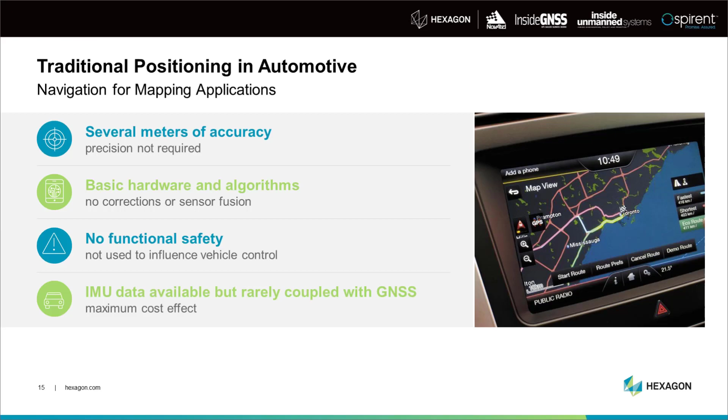So with this introduction of autonomous technology and even driver's assistance systems, we're talking anything level 2 to level 5, is where there's a real demand for augmented GNSS positioning, right? So we're going to start talking lane level. We're going to need the vehicle to know where the lane is and that it's within that range. So we're talking down to the sub-meter level and also assuring that positioning. So let's talk about how we get there, right? So walk us through a little bit of how we can get to that sub-meter and assurance.

So really the big first step is enhancing the hardware. We need to talk about multi-frequency, multi-constellation. We really need to get all the data that we can. You need to have at least the dual frequency antenna and a receiver and all the things into the vehicle to get you there. And that takes you from several meters down to the meter level.

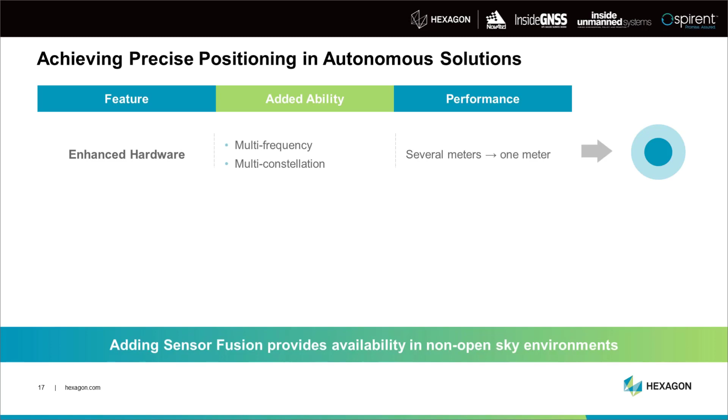Now, if you feed in some correction data, so you get correction services of some sort, and you feed that correction data into that algorithm, that'll get you into the decimeter range, right? So that starts getting into the sub-meter, and that's where you can start saying reliably that you're in the lane of the road.

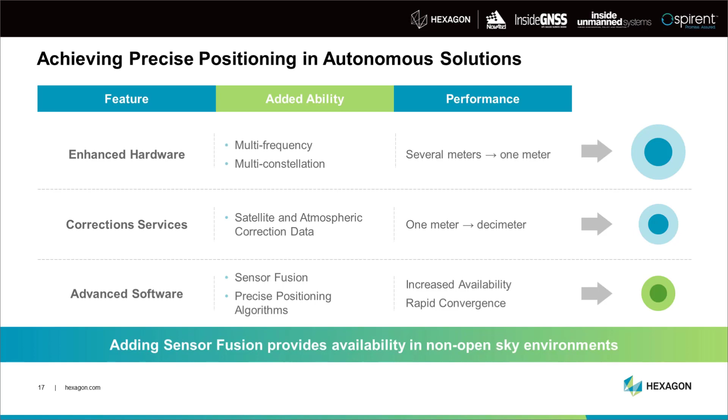The advanced software now is where the really sophisticated stuff comes in. This is where safety comes in, sensor fusion to increase your availability, your algorithms and that stuff to get rapid convergence, so that way when you turn your vehicle on, it's there right away for you to be able to use. So this is sort of the steps to go from what we have in most vehicles today down to the autonomous systems for positioning.

So I'm going to peel the onion here a little bit and talk about the corrections, right? So I mentioned corrections data as a critical point to get the system to work properly. There's two ways of doing this, and two common terms out there.

RTK is one of them, and PPP, or precise point positioning, is the other. RTK involves the end user, the customer, setting up a base station of some sort in a known location, and that's key. It then compares its measurements from the satellites to that known location and provides a correction to that measurement to the receiver in the vehicle, or the rover, as we call it in the diagram. Important thing to note here is that's a two-way communication between the base receiver and the rover.

Precise point positioning: in our case, Veripos and Hexagon have a corrections feed that we can provide to the users. We have all the stations running and are maintaining those, a very critical part of it. And that allows for a one-way data transfer, or one-way communication, to the vehicle. So this really helps with the security and all those things. And that typically is done over the internet or LTE or some sort of network connection.

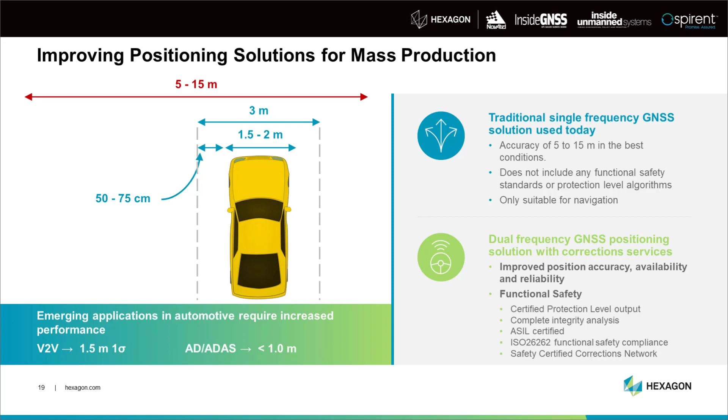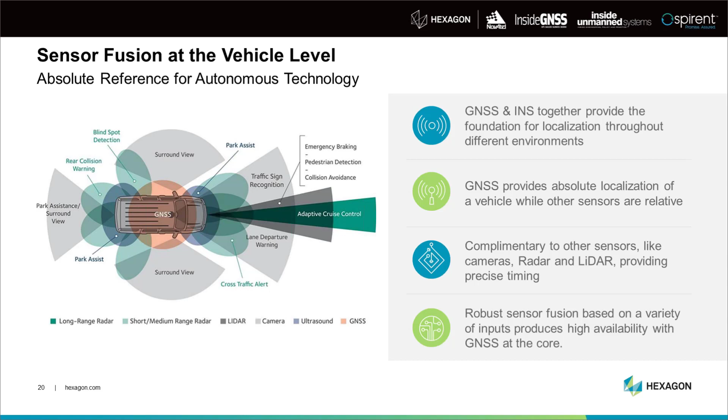All right, let's talk about all the different sensors. Everyone always talks about LiDAR and radar and all these things. A frequent question we get is, can we replace some of these with lower cost, or if we have a good GNSS receiver, what's the cost trade-off? But it's really meant as a complement. You can see here all these relative measurements, or relative positioning, as we call it. LiDAR, cameras, it's all looking at the relative surroundings, whereas GNSS is an absolute measurement on the globe. It tells you exactly where you are in the world. So the systems are really meant to complement each other and be integrated together, especially on the safety side of things.

Obviously, urban environments are always a challenge. People always ask how does your GNSS work in an urban canyon? Well, if you block the sky, there's not much we can do from a GNSS point of view, but there are sensor fusion and IMUs that'll help you with that, and the other sensors will do really well in this situation as well. So again, it's that vehicle level solution that is really the point here.

So let's talk about the system architecture on a vehicle: electronic control modules and all the electronics. There's hundreds of modules on a vehicle, but particularly for our solution into production, we have GNSS antennas and the LTE antenna. There's always some form of telematics module, usually tied to the infotainment system. And then there's some sort of feature control module, an ADAS or autonomous driving module, and that's where your artificial intelligence will often be sitting.

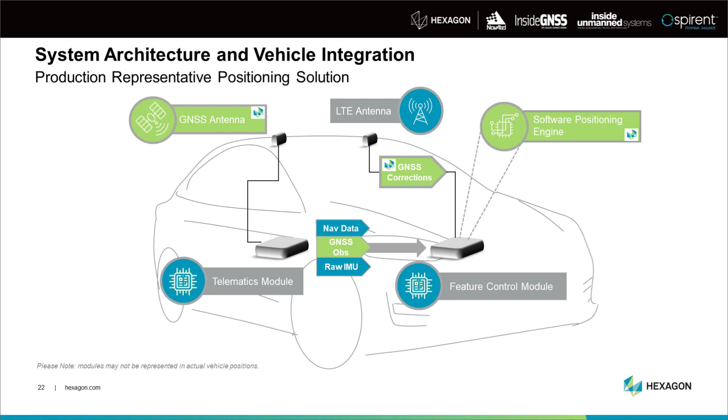So our solution integrates into this very nicely. We take the GNSS measurements and observations from the telematics module, and that is fed into the feature control module where our safety-rated software positioning engine would then give you the feature control.

So the output there is position, velocity, attitude, and that is fed into the vehicle control. So let's look at this closer. From a validation point of view, all you automotive guys out there on the line, and any electronics module manufacturer for that matter, all understand the system boundary diagram, right?

So the device under test, and I'm just going to pick on the software positioning engine alone. We look at all the inputs on the one side and we have all the outputs on the other side. As we test, we're always monitoring outputs and we need to vary the inputs. I'm just going to talk about the range and the observation data input. All the ranges need to be tested.

Every functional range, everything that you could possibly think of as an input in the world has got to be fed into this, including how it fails, all the faults. Some of the value ranges we talk about here are like satellite geometry. If you're tracking 10 or 20 satellites in the sky, imagine all the possible geometry combinations there. And then think about how they'll fail, or if you're only down to 6, what happens?

All of that full range needs to be tested: multipath, signal to noise, and that satellite count as I just highlighted. And in addition to that, how they fail. You need to understand the failure mode of each one of these, input that into your software positioning engine and see how it behaves. It needs to behave in a completely predictable and consistent manner in order to achieve that safety.

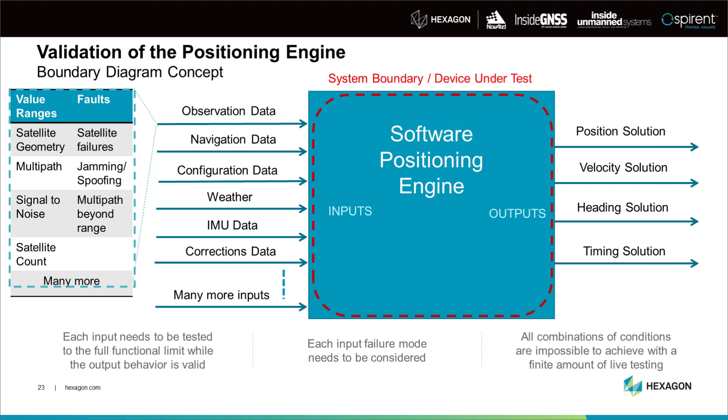So faults are satellite failures, jamming, spoofing, multipath, and I'll talk a little bit more about that in range. You can imagine every input has a full range of functionality, a full range of faults. All that stuff needs to be taken care of.

So integrity, there's another definition I'm going to pick on a little bit. That's basically a study of how GNSS can fail, or the positioning solution can fail. We really need to understand that in order to give it a rating and to make sure the performance is there. Ground segment failures, false orbit calculations, those are all part of it.

Hardware failures up in the satellite itself, what we call evil waveforms. That's truly a definition, not a word I just made up. If we get a waveform that has been tampered with or not broadcasting properly, that's important. Atmospheric failures: not everybody knows the atmosphere does weird things, bends the signal and does a whole bunch of funny things to it, but it's really the extreme conditions of that.

What happens if you have an ionospheric storm that happens once in 100 years or something? These are the conditions that really need to be predicted. Difficult multipath, and I'll talk about that in the next slide a little bit. There are some conditions in multipath that are really hard to detect. You can't just circle your measurements and say this is my safety range.

And then spoofing and jamming, as we saw from the poll, this was a hot topic as well. There are a lot of ways to mitigate this and to detect it, as a matter of fact, with the algorithms that we have. Then there's your cybersecurity side. If someone's hacking into servers and then broadcasts to all the vehicles on the road, that type of thing. So all these things are really, really important.

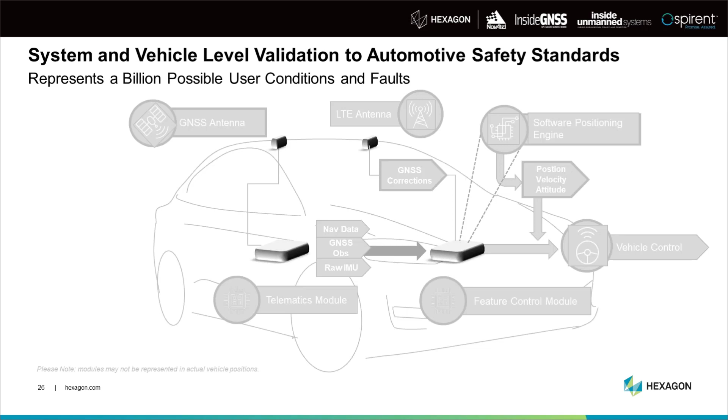We're talking billions and billions of possible conditions in the world, everywhere around the planet, in the vehicle, user errors. I mean, all these things are inputs and outputs, and that all needs to be done in the analysis, as Richard had introduced us to earlier in the talk as well.

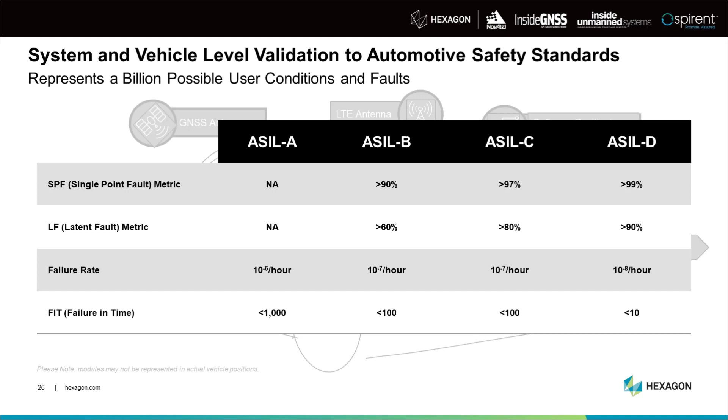So typically your ASIL ratings, your safety ratings for autonomous driving, is ASIL D, right? So your failure rate there has got to be 10 to the minus 8 per hour; that's all it's allowed to miscalculate or misrepresent. So really, really stringent safety on top of millions and billions of combinations. This is really what we're faced with, and this is how we dissect it and get the solutions out there.

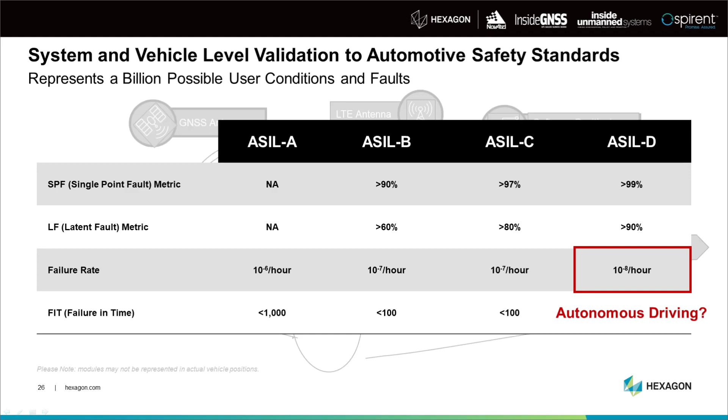And for those of you in the audience who during the poll question at the beginning wanted to choose multipath and sent in comments about it because it wasn't offered, you saw that Gordon did discuss multipath there. We were simply limited in the number of options we could offer you. But multipath is definitely a failure mode that is factored, and we are discussing today and will continue to discuss.

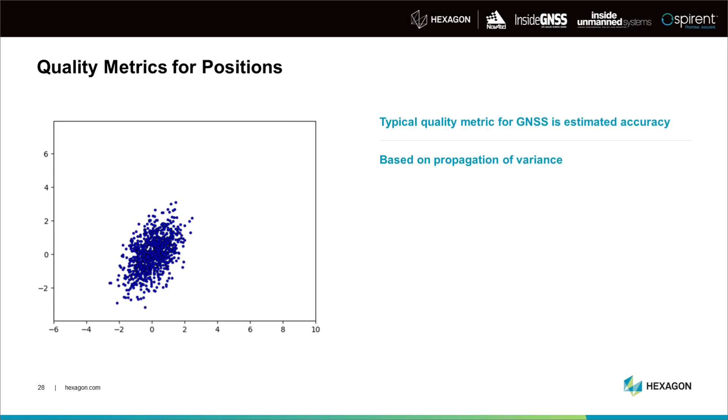Typically, from a traditional GNSS system, the quality metric that you'd be used to seeing is the estimated accuracy. It's based on the propagation of variance through the position computation. You'll have some point cloud coming out of your system, and you'll get a confidence ellipse around that point cloud, sometimes a confidence circle. And you'll see these at various levels. 68%, 95% are very common.

The problem with this as a quality metric is that it assumes that all of your inputs are zero mean Gaussian variables. It doesn't consider the possibility that you could have a bias on one of your observations. So for example, the case that Gordon was just talking about, where you have only the non-line of sight multipath signal, you have a bias on this observation.

The bias propagates into your position, and it will bias the entire output without changing any of the other random properties. And the confidence ellipse that you have doesn't reflect the shift at all, because it's made the assumption that the inputs were unbiased. So this is an inadequate quality metric from a safety standpoint, because you need to be able to catch these sorts of situations.

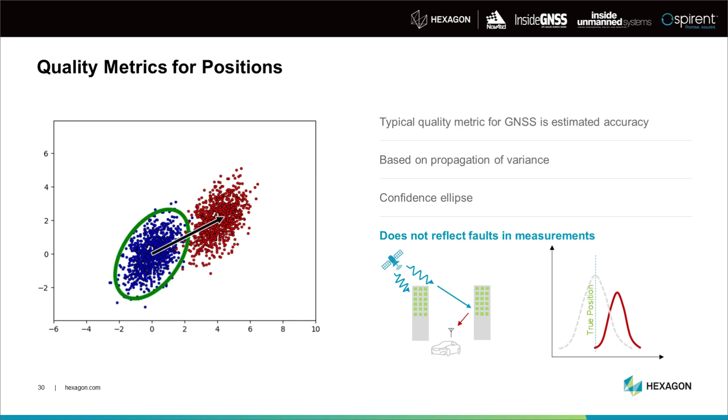So we need to replace it with something that can bound these positions even if there's biases present. And in high integrity GNSS, the metric we use for that is called a protection level, or PL. And essentially it's an estimate of the maximum possible error that you could have in the position at any one time. So it considers that you might have undetected biases on your measurements. It tries to provide an upper bound if that's the case.

What it doesn't do is it doesn't make any claim about the distribution of the errors. It's not saying for sure that you're more likely to be at the center of the region or not. So in that respect, it's not the same as a confidence ellipse, but its objectives are different.

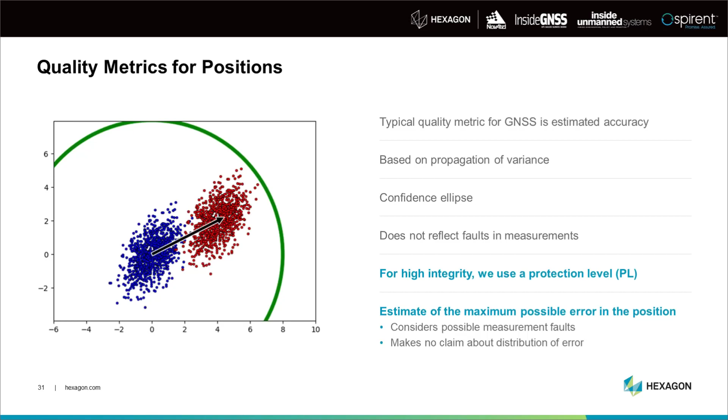So if I throw in a few more definitions here for integrity, we just talked about the protection level. It's the maximum possible error. It's an output from your positioning computation. You compare that against an alert limit, which is the maximum error that the system can tolerate. And this is part of your system design, and I'll talk about some values for that in a moment.

So anytime your protection level is less than your alert limit, you know you have less error than you're willing to accept, and so you can use the output from that system. If the protection level is greater than the alert limit, you can't be certain that your error is at an acceptable level, and so you shouldn't use the output.

So in terms of requirements, we're typically talking about an integrity risk. This is the probability that the true error is greater than your estimate of that true error, which is the protection level. Because we're dealing with random events here, that is still possible. We try to keep that very low. And this is the main safety requirement. And so here you'll typically see very, very, very low margins for this risk.

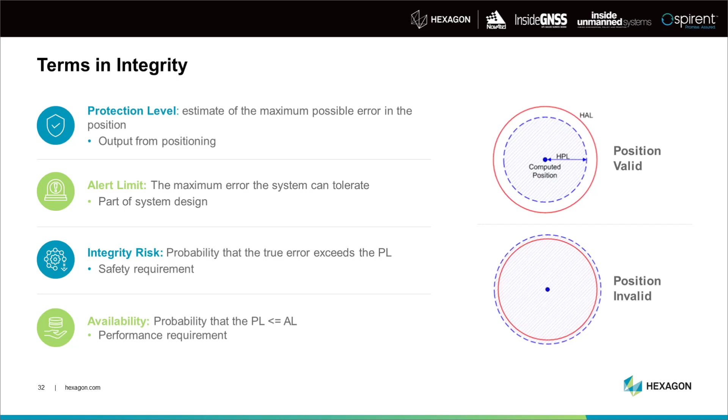The other requirement is the availability, and that is the probability that your protection level is less than the alert limit. As long as the protection level bounds the error, the system is still safe, but if it's too large, the system isn't usable. And so this is the real performance requirement. It tells you how often you're going to have output from your system that you can make use of.

For V2V, about a meter, actually 1.5 meters, 1 sigma, is the spec recommended by NHTSA. For autonomous driving, we're looking at that lane level positioning, and so the requirement on the entire system will be something less than a meter. And this is the requirement on the entire ADAS system with all the sensors going into it. The requirement on the GNSS or the GNSS INS input into that system will be different than that. It really depends on how the system is put together.

Availability, probably on the order of 90 to 99%. We need it working most of the time. And the integrity risk, this also really depends on the safety concept. It depends how much redundancy you have, which types of sensors go in. You could see anything from 10 to the minus 3, maybe 10 to the minus 8 per hour.

It's tempting to compare this to the hardware failure rates in ISO 26262, which are 10 to the minus 7 failures per hour for ASIL B or C, and 10 to the minus 8 for ASIL D, but it doesn't necessarily have to be the same as these, since those aren't specific to defining the risk of your positioning system. And I'll talk a little bit more about that tomorrow when I discuss the various standards.

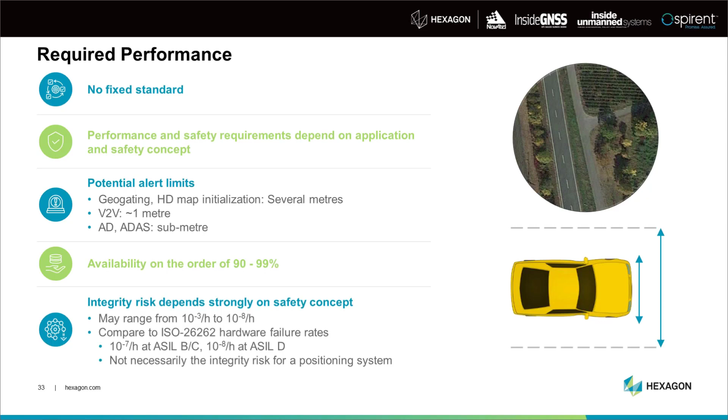So Gord showed this slide a moment ago. We have all these failures. How do we actually account for them? A great tool for that is a fault tree analysis. So you can show how all of the different risks are allocated throughout your system. You can assess them independently, and you can sum them all up.

Some errors, you may not have any help from your correction service because they're only local errors, multipath or hardware failures. And so here the client will have to take care of that entirely by itself.

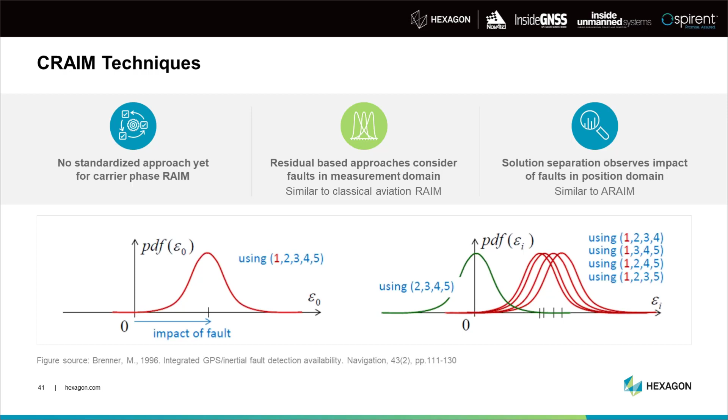The new ARAIM methods are based on solution separation. And the idea here is that you compute your position multiple times using different subsets of the measurements. So if you have a fault on one satellite, in this example shown here, a fault on satellite 1, the set that doesn't use satellite 1 is not affected by that fault. And so you can see how it separates from all the ones that are using satellite 1. And that separation between your different solutions gives you an indication as to how much impact you can be having from those errors.

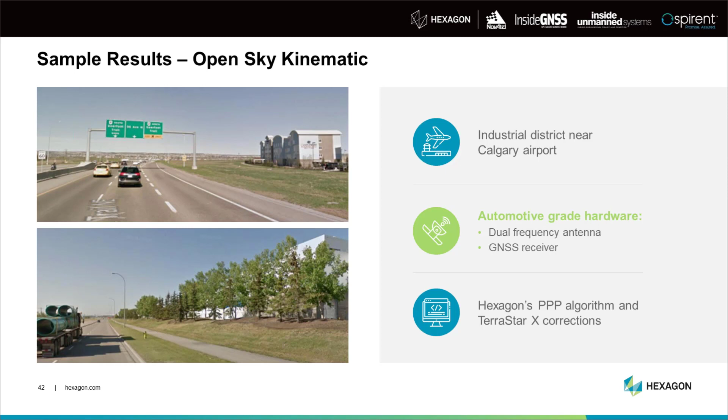So this is using automotive grade hardware, a prototype automotive antenna, a dual frequency automotive receiver, and then our TerraStar X corrections and our software positioning engine. So this is the performance you see in horizontal error. The accuracy of the system is down around 20 centimeters. The protection levels are coming down to below about a meter after some convergence time.

And on the right here, if you're familiar with it, this is a Stanford ESA integrity diagram. It's a plot of the protection level versus the actual error. And what we want to see here is that we're always above the diagonal, which means that we're always bounding that error correctly. And in this case, we are. That's open sky, of course. It is fairly benign.

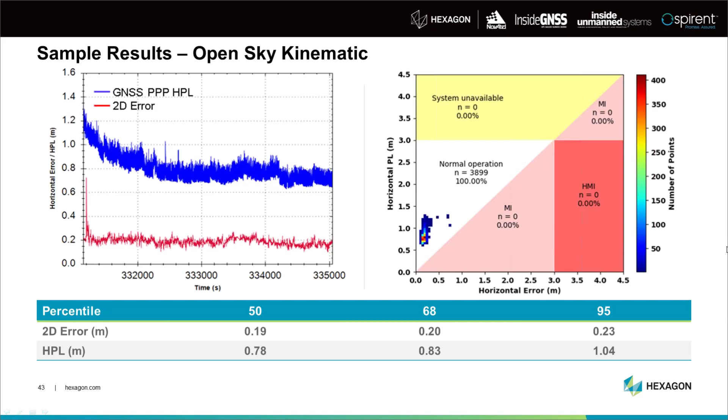In the real world, you're going to have challenges. Specifically, a lot of these systems are targeting highway driving to begin with, and so you get frequent overpasses. And those will cause a brief outage in your GNSS. You lose your carrier phase ambiguity information. So if you're running GNSS only, this causes a larger jump in your protection level because you've lost all that information in your filter. You have to have some reconvergence time. And this is where sensor fusion really becomes useful.

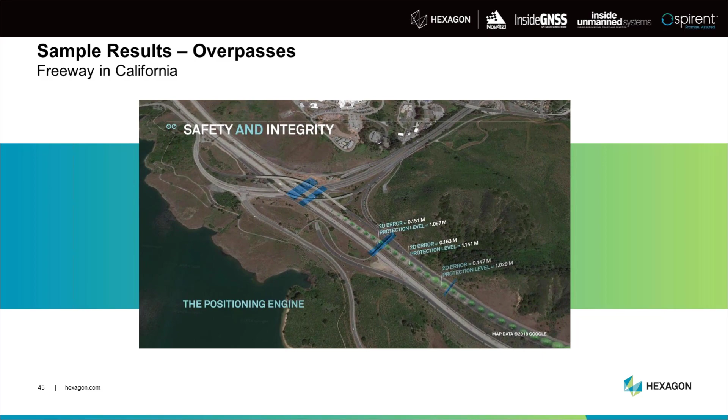So I have a video here showing what happens in a case in California. This is a highway in Silicon Valley, and the protection level is showing what happens as we go under these overpasses coming up. It's a little bit hard to see, but we're in sort of that 1 to 1.1 meter range. And then as we come under the overpasses, you will see the protection level jump up a little bit. So there we jump up to 2.3 meters, 1.5 meters, 1.2 meters.

So you do get a bit of an increase because for a second or two there, you're propagating on inertial. You have to account for the uncertainty in those measurements, but that really does help us come down a lot faster than in the GNSS only case.

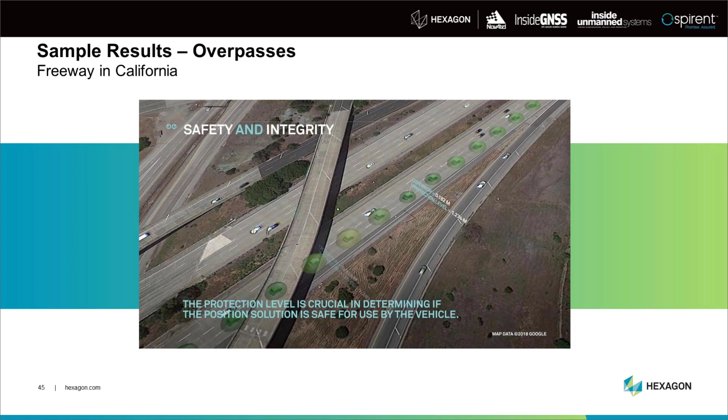And the result is actually quite staggering. If you want to prove that your autonomous vehicle is at least as good as human drivers in terms of fatalities at a 95% confidence, you have to drive for 12 and a half years with no failures at all. Assuming that you do have some failures and you want to build up enough to prove that you're at least as good at, again, a 95% confidence level, you have to drive for 400 years. And that's assuming you have 100 vehicles driving 24 hours a day all year long, which is quite a large fleet.

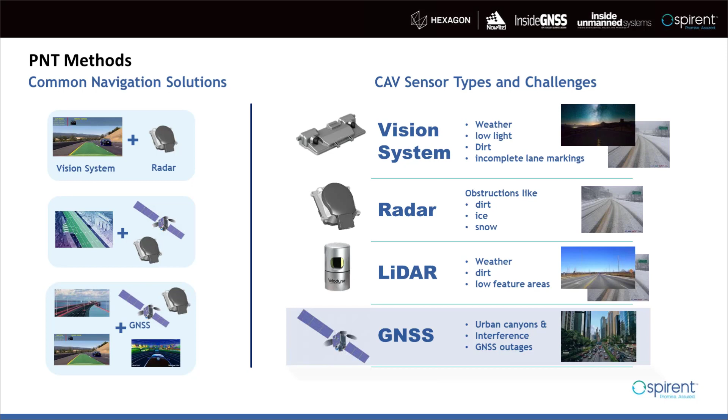So let's pick a system which is V2V that we heard before. A V2V system needs a common reference for communicating between two different vehicles. And how can you achieve that? As long as you are talking about the same feature in the same global reference frame, it becomes more reasonable for vehicles to understand. And for the purposes of our presentation, we will be talking about GNSS predominantly, and we will be talking about aiding GNSS with IMUs and other vehicle-based sensors such as wheel ticks.

Remember the fault tree that Lance brought up? Now, how do you make sure that the integrity levels are well managed? How do you make sure that the true error does not exceed the protection level due to sensor faults, right? And this is where simulation comes into the picture with its capability of having ground truth, which is the fundamental of simulating everything.

The ramp fault in pseudo-ranges that Lance brought up is a typical failure mode in GNSS and is one of the major sources of undetected faults, right? It's one of the sources. You do have a lot more. So for example, in a highway scenario where GNSS signals are unobstructed, there could be a possibility for segment errors which are considered as corner cases as well. Each of these will have different impact on the performance of the receiver.

For example, in 2014, GLONASS suffered a system-wide outage for 10 hours. And in 2016, similarly, GPS had a timing error which exceeded the design spec. In both cases, it is not a receiver design error, but it's a system issue which still needs to be considered, and the corner cases have to be reproduced and tested against the integrity levels.

There are reports which say that some of the receivers used the autonomous integrity monitoring software to isolate the errors, but the others which did not use them did notice huge clock bias estimates, which in turn made the receiver not track any of these measurements, right?

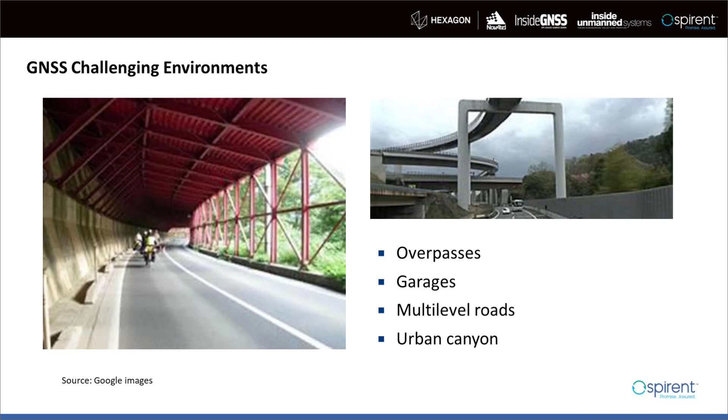Now, these challenges are happening more and more, and we need to make sure that these are completely taken into consideration. And this is one area, again, where simulation comes in handy to speed up your test cycle. So this leads us into using more sensors along with GNSS, which means these additional sensors also come with their own challenges, which increases the probability of things going wrong with individual sensors by themselves and with a combination of these sensors.

Right, so as you can see, IMUs come in different flavors. Consumer grade to nav grade, each at a different price point and various quality levels. Not all IMUs are really created equal, even within each of these segments. Each IMU has its own strengths and could be designed to address a certain tailored need of a specific application. These different sensors also have to have a standard means of reporting specs, which there is no standard means.

So for example, let's pick a nav grade or a tactical grade IMU, which on their spec sheet typically talk about angular random walk, velocity random walk, gyro bias, and accel bias. Whereas the MEMS inertial sensors predominantly only talk about the angular random walks and velocity random walks. Now, some vendors do provide the bias values, but the bias values are so huge and there is no repeatability of those bias values that these numbers cannot really be used in meaningful ways. And not to mention the different formats and data interfaces.

Right, so with that said, teams designing navigation filters for safety critical systems need to be mindful of the kind of IMU to be modeled. For example, if a high-end IMU is being considered for design, only bias drift and random noises should be or can be considered as filter states. Bias drift is typically modeled as a Gauss-Markov process. Whereas for low-cost MEMS inertial sensors, the bias and scale factor should also be considered in addition to the previous states. So everything becomes critical. You have to take into account all the different parameters, all the different things that can go wrong.

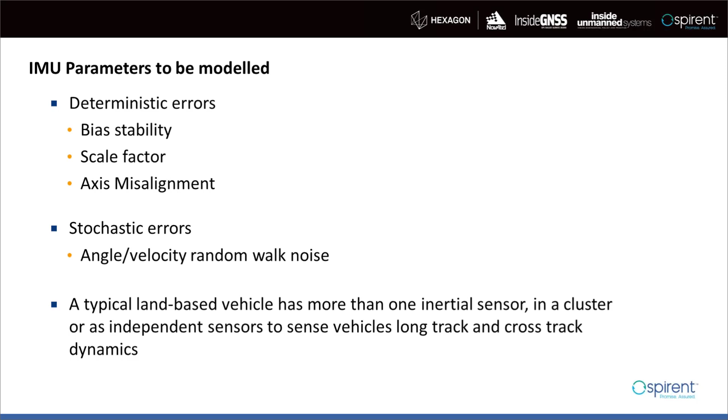Simulation can allow design teams to inject the right IMU faults to the test and estimate how the navigation performance is working, or how tolerant it is to these injected faults. There are too many parameters to keep track of, and tuning the filter to a certain use case is critical.

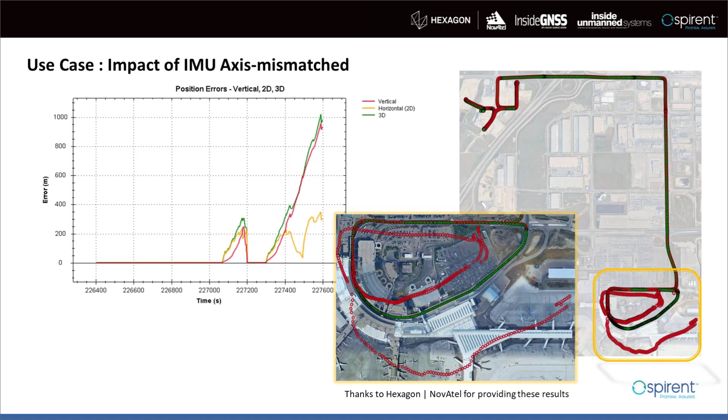Now, let's move over from the IMU and see how the other sensors that are vehicle-based, for example, the wheel ticks, are going to impact the nav filter. Just a quick intro, an odometer is an electronic device that generates an integer number of digital pulses every time a wheel on the vehicle makes one revolution. These digital pulses need to be translated into distance traveled, however. That's when the scale factor comes into play.

As you can imagine, the scale factor is dependent on the kind of vehicle, because you need to take parameters such as the wheel radius, the pressure, the temperature, the tread depth, and the speed into account to predict the distance. This is all captured in research. Scale factors are known numbers for each of these vehicle types, but the errors on the scale factor itself could be random errors. The drift in the odometer scale factor and the quantization error will show up as faults and end up in the position error estimate computed using odometer information. So those are some additional faults that we have to take into account.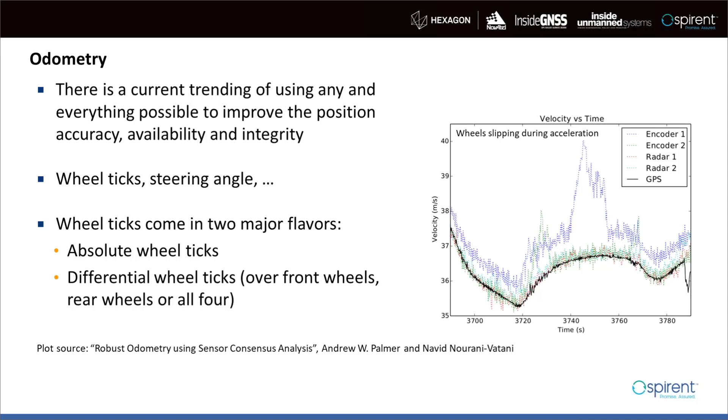Not just that, there's another error which is more important to take into consideration, which is the wheel slip. This needs to be modeled correctly because wheel slips happen due to the measurements slowly diverging from the true state. The impact of wheel slips on position is also significant. For more in-depth analysis, the reference at the bottom is one good paper where you can get more insights into how this can impact the overall position error. So putting all of these together, we need to take advantage of all of these sensors available on the system.

Everything that we have spoken about so far, GNSS, IMU, wheel ticks, magnetometer and barometer, we did not have enough time to really touch upon. But there's enough research available. Please let me know if you do have any questions or concerns regarding that.

But with all these sensors, we need to be able to systematically design our nav system so that it is tolerant of any faults that may produce large position errors. As we know, these faults that affect in current time do have impacts on the future as well. So it's very important to take everything into account, which means there is a critical need to validate the system under a combination of various sensor faults, and simulation is the right place to go.

Now, with all that said, there is one other important consideration that we have not talked about so far, which is the vehicle trajectory and what impact it might have on the navigation system overall. So, for example, let's consider how frequently the vehicle turns, how fast the vehicle moves, and how frequently it stops. All of these do have an impact on the position accuracy of the overall system.

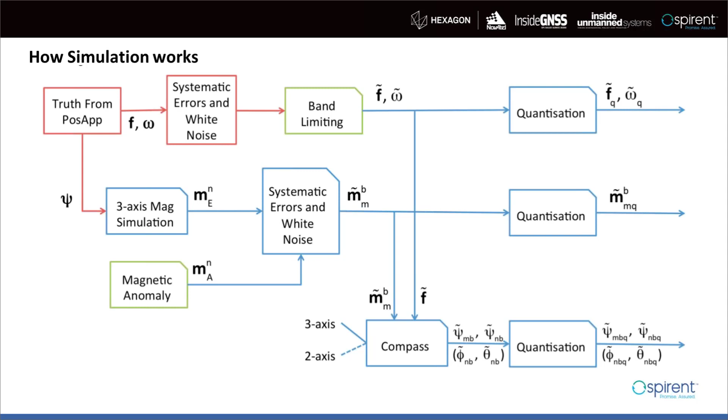I don't want to get into the details, but I think it is really important to understand that a good simulation environment will give you the right levers so you can add the right errors or faults that can be modeled and designed to be mitigated. It is really important that you choose the right simulation environment or platform. You don't want to be in a position where you don't know if the source of your position error is due to a simulation issue or a nav engine performance issue, right?

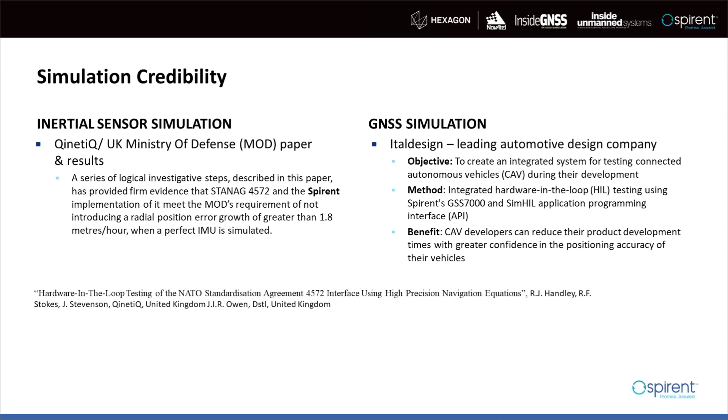In conclusion, integrity risk evaluation is important in safety critical systems because the navigation system is designed to meet expected levels of integrity, and it is expected to provide its users with timely alerts when the system cannot meet these integrity requirements. There is no better way to evaluate integrity risk than in a reliable simulation environment. It is very important that you choose the right simulation environment so you can focus on your development rather than debugging the simulation tool itself.

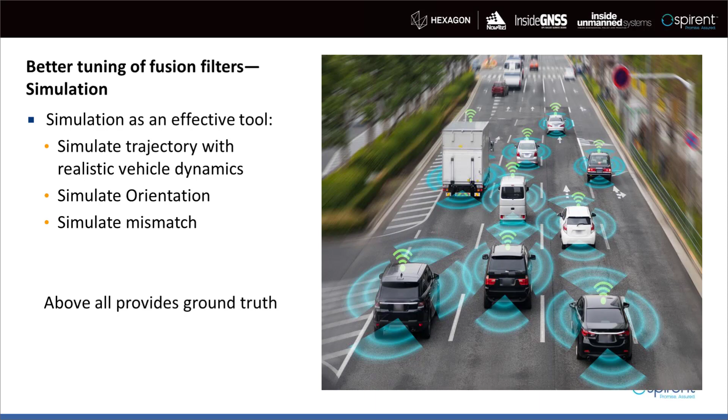We're going to have more questions from the audience in just a minute, but Lori, let's first find out some answers from the audience to our question. All right, and there on the screen is our third and final poll for today. The question is, what type of IMU errors are you most concerned about? Bias stability, scale factor, axis misalignment, angle, velocity, random walk noise.

So it looks like we have a majority, 44% saying bias stability, 4% scale factor, 19% axis misalignment, and 33% angle, velocity, random walk noise. Alan, thoughts here? Well, I'm going to keep my rather impoverished thoughts to myself because I'm not an IMU expert. I'm going to defer to Ajay on that.

Actually, Ajay, we have a number of questions that have come in regarding the IMU that you just began to talk about. So I'm going to give you the chance to return to that, and we'll have questions for the other panelists as well. But first, Ajay, how representative can the IMU measurements be in a simulation environment?

Right. So they can be. The short answer is they can be very representative. Now, the long answer is it really depends on the amount of information that we have access to. So the more information we have access to about the IMU itself, the spec itself, the better we can model the IMU, and we can add that in a simulation environment.